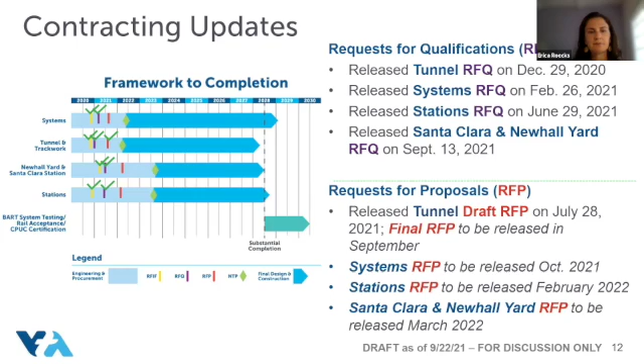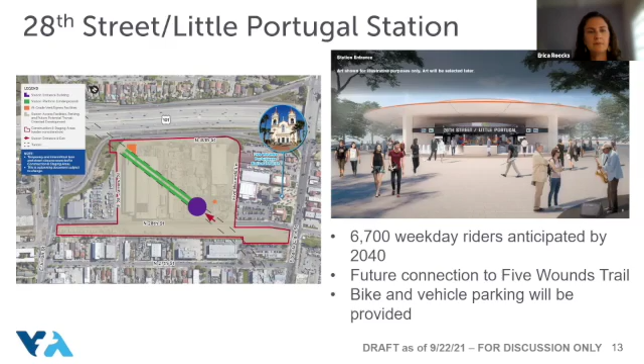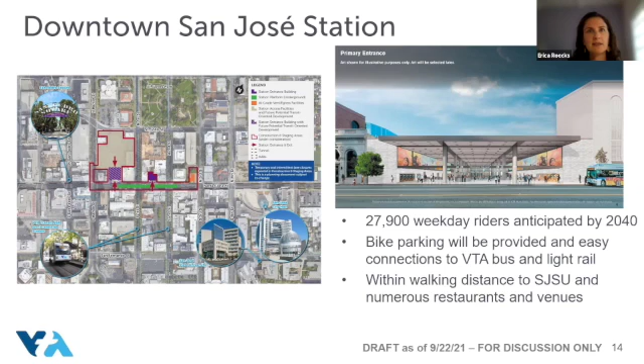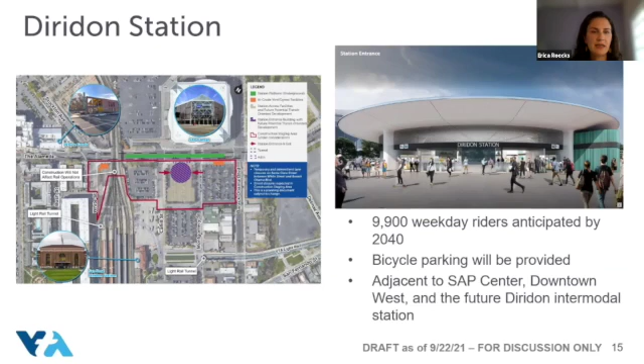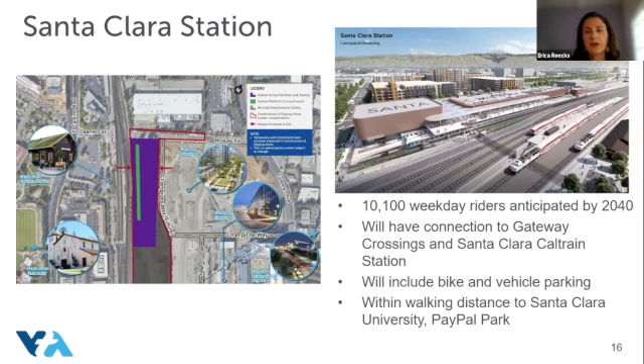Unlike the other three stations, the Santa Clara Station concourse will be elevated, and the platform will be at ground level, similar to the Warm Springs station. The elevated concourse will provide access to the at-grade platforms over the adjacent BART storage tracks.

And that's the phase 2 update we have for this time. I'm happy to take any questions.

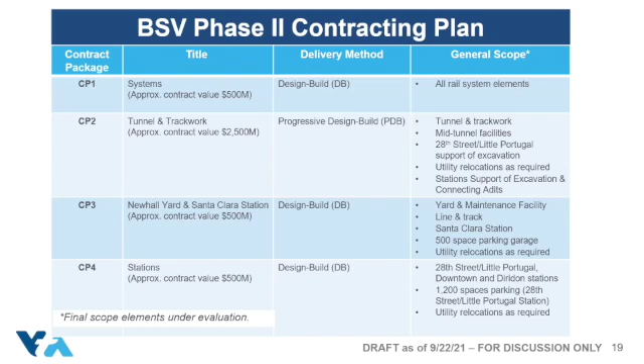CP1 and CP2 are set to begin in mid-2022 and go until early 2028 and 2029, while CP3 and CP4 are both set to start in late 2023 and go through mid-2028. Revenue service is scheduled to begin in the year 2030.

The project delivery method for CPs 1, 3, and 4 is design build. This means that architectural design and construction services for each fall under a single contract and have a single point of management, with the design beginning with a 30% package prepared by the owner and the remaining design left to the builder in accordance with owner-defined criteria and standards.

Design build allows for simplified procurement processes and better integration of the design and construction phases. This also means the design and construction teams are formed prior to the proposal stage. The cost of design build is competitive, but the main driver is its faster project delivery, since construction can begin in parallel with design, build can provide significant time savings.

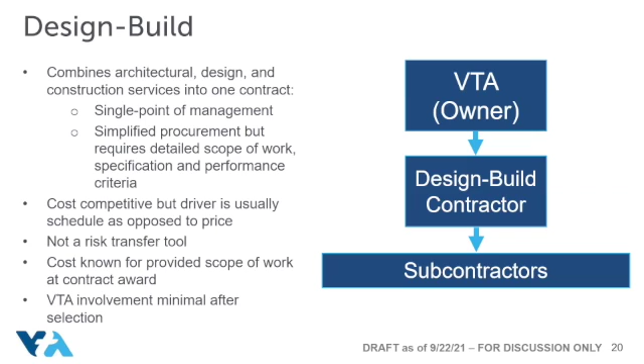According to a 2018 study by the Construction Industry Institute, design build projects had 102% faster delivery speed than the more traditional design bid build. Cost is also known when the contract is awarded. After selection, the design build contractor uses their skills and expertise to complete and build the project. VTA's role is to oversee their work.

Progressive design build is the project delivery method for CP2. The process is similar to design build, but contracts are made with the design build contractor at an even earlier stage in the project's development, utilizing about 10% design definition, and the contractor selection is mainly based off of qualifications.

Due to the contract size and complexity, a high level of collaboration and input from VTA, BART, and the progressive design build contractor is required throughout the design phase and construction phase. This helps avoid creating a design that is either too expensive and/or challenging to build. This process also creates a transparent and iterative open book cost evaluation estimate, maximizing innovation and limiting project risk.

Since progressive design build helps identify and mitigate issues early, CP2 will benefit from this project delivery method as it allocates risks appropriately and welcomes an open and collaborative environment between both VTA, BART, and the contractor.

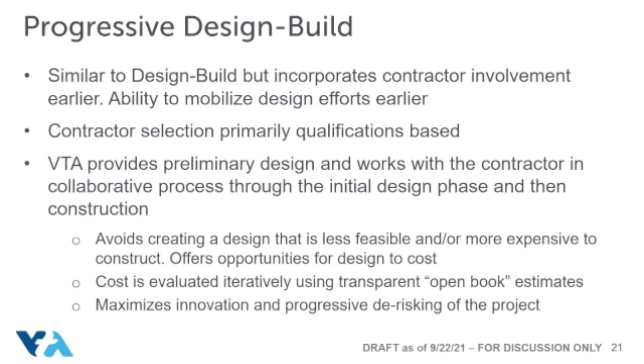The project's progressive design build process will include two main stages. Stage 1 will include collaboration between the progressive design build contractor, VTA, BART, the City of San Jose, and the community. It is in this phase that pre-construction design will be advanced from 10% to 90%. The bulk of pre-construction activities and some limited preparatory early work will also be included in this process. This will also include starting the procurement of the TBM, which will be specifically manufactured for the project and will take over a year.

During stage 2, the progressive design build contractor will provide a proposal that includes construction costs, schedule, and risk mitigations. Stage 2 will follow the construction process through the completed design.

Thank you for taking the time to learn more about VTA's BART Silicon Valley Phase 2 and how the VTA plans to deliver the largest public works infrastructure project in Santa Clara County's history.

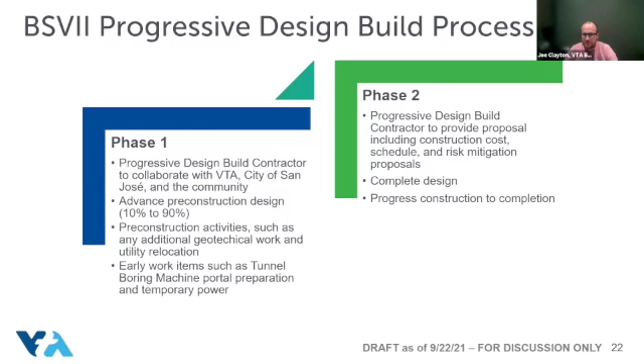Thanks, Joe. Do we have any questions from CWG members? Feel free to raise your hand. And I'll just check the Q&A box. Okay, not seeing any come in. Thank you so much, Joe. Appreciate you joining us this evening.

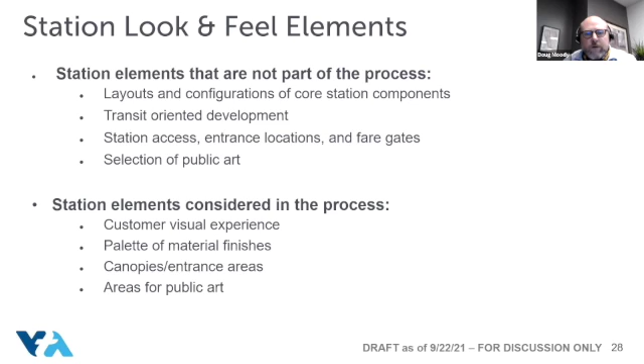Next slide, please. So the process for the look and feel elements of the station - we're entering into the finishing stages of it. We had 4 rounds of DRC committee meetings. We had the broad public engagement that we're currently summarizing the info from. The culmination of this work goes into a report that will be entered into the RFP for design build contractors.

And then that RFP is wrapping up here very soon. After that, there's a few months of work that happen. There's internal review with the VTA/BSV project team. Then the RFP is reviewed with the City of San Jose for this particular station, and the BART team, where they have an opportunity to comment. Then comments are addressed, and the RFP is finalized.

And then the RFP for the design build contractors for the station is released in the first half of 2022, with that report. The focus is on the findings from this work for what the design, the look and feel elements of the station should be.

And with that, I'll pass it over to Peter to talk about some of the concepts that were shared with the public.

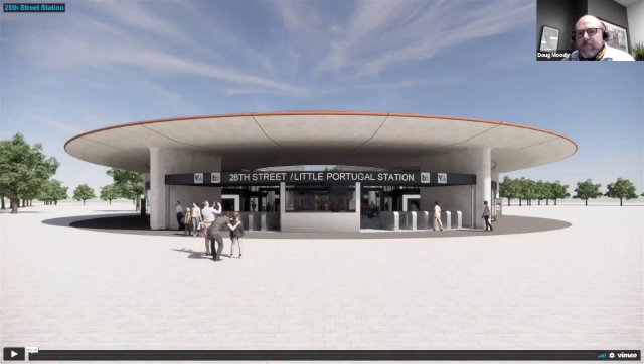Good afternoon, everyone, and thank you for hosting us. I think most of the material here, if you've been to the Social Pinpoint website, you would have seen, but I'm just going to talk you through some of the materials.

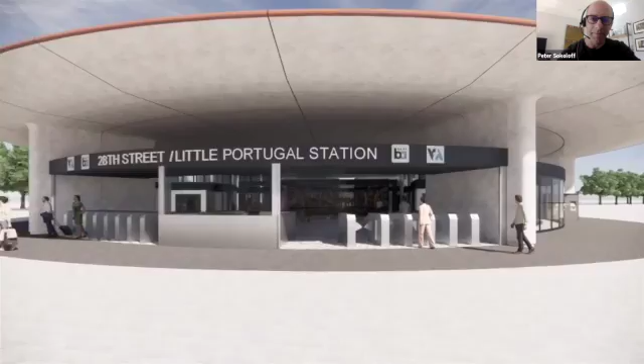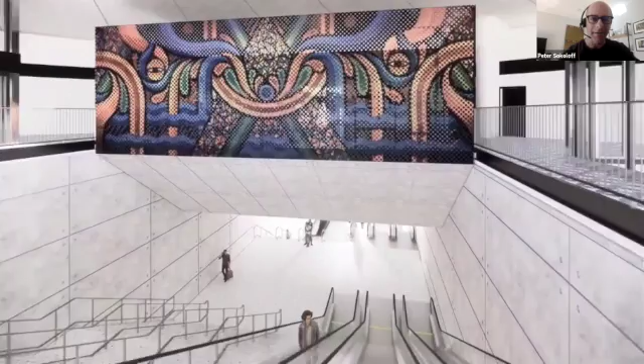This is a fly-through of the station at 28th Street, Little Portugal. So you're entering here and just gone through the fare gates. We have a circular canopy which lets natural light down into the lower parts of the station. You can see one of our locations for public art up there at the top of the escalators. Then you come down to an intermediate landing, down to a second run of escalators as you head down to the concourse. This is a second location for public art - again, these aren't the art pieces themselves, just the locations we're talking about.

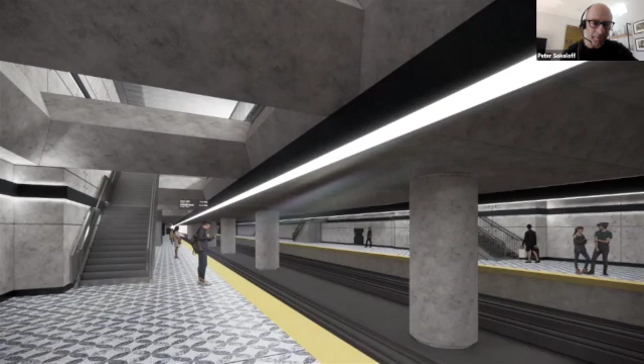This is the concourse level, and these stairs lead you down to platform level. So in the fly-through, we're just going to pick one of those to come down onto the platform. 28th Street has 2 side platforms, so side loading platforms with trains down the middle. This is now kind of looking back at platform level. Again, the fly-through is really just to give you an overview of the configuration of the station, so you understand how the spaces fit together.

This presentation goes into some of the material selections and the content from the design review committee work we had done up to the point of the Social Pinpoint, just to give you an overview of that. Again, here you'll see the scope of the design review was really about the look and feel of the station, the materials, floor and wall finishes, and the locations for future art. Go to the next slide.

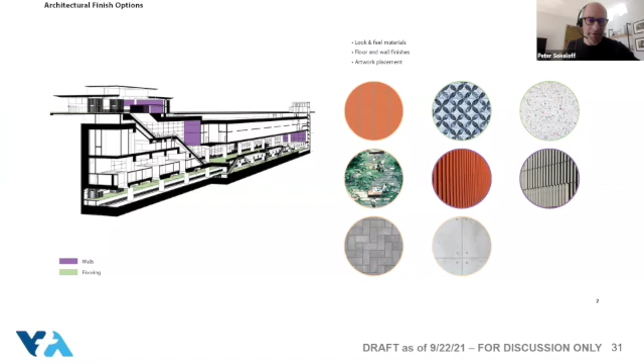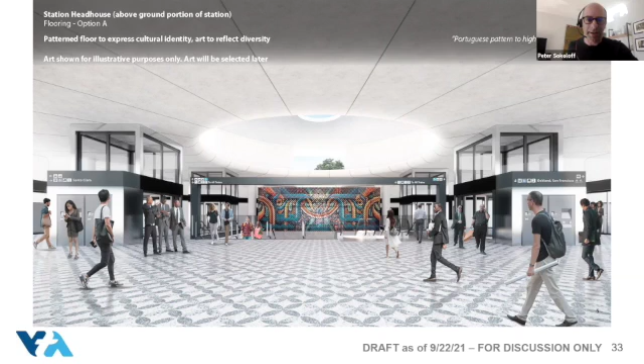And then paving going up to the station entrance. As you enter the station, another thing that evolved was a few different options for floor treatments. This one is a terrazzo floor with that Calzada Portuguesa pattern, which references both the local community and the cathedral, and helps give the station a unique identity.

We also had an option which was a more typical terrazzo floor. It's more neutral, and some people felt it was a bit calmer. It also has more of a reflective quality, letting more light into the station.

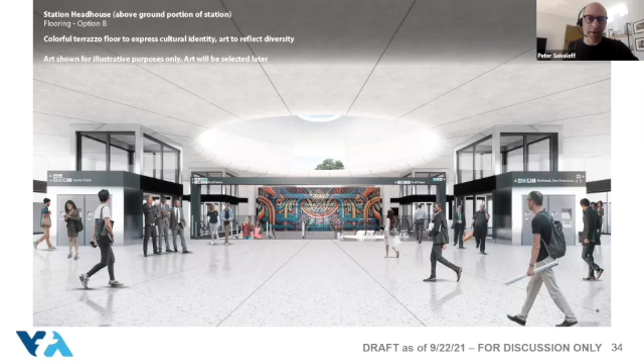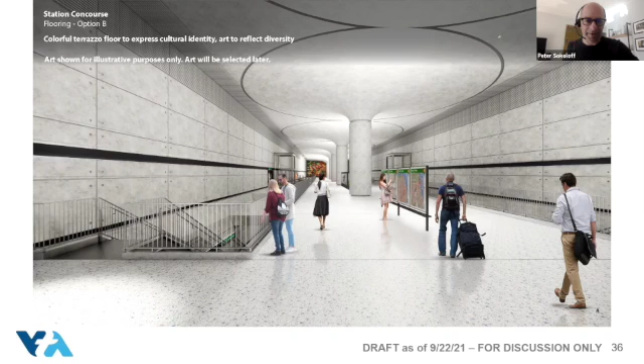Similarly, those two options play out down at the concourse level—both the pattern floor and the more typical terrazzo—and the same down at the platform level. There was a lot of positive feedback on the social pinpoint about the pattern floors, especially at platform level, where it can act as an identifier for the station—if you just look out the doors when they open, you know exactly which station you're at. We're still working through that.

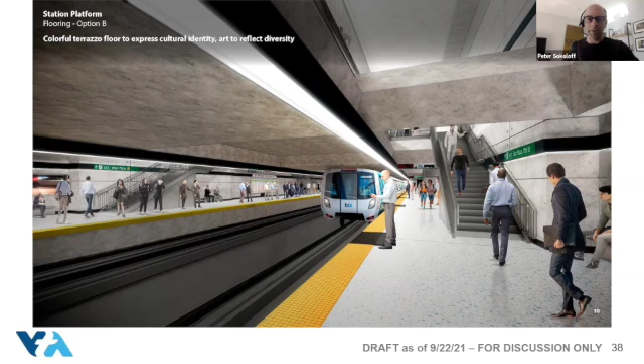We did get some feedback from BART about the technical aspects of having the pattern floor, which we have to work through. But that was definitely one of the key areas of feedback from the social pinpoint—getting people's views on that.

The second topic of discussion was the treatment of the pavilions at the backside of the station head house at ground floor level. The front of the station, shown in the previous image, faces onto the plaza and is quite open, but there are a lot of technical rooms and spaces that need to be enclosed on this backside, so we had a few different options for the cladding and wall treatment.

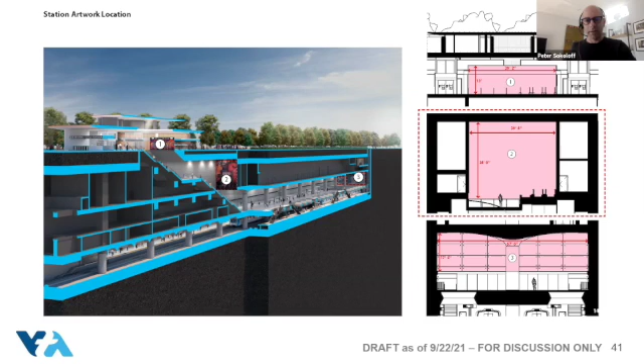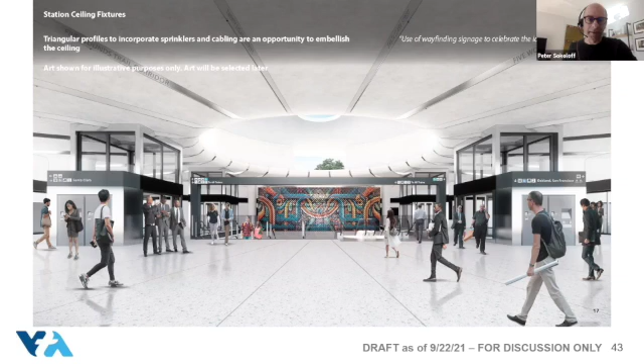The third topic was the location for the art, which I mentioned as we went through the fly-through—three potential locations. One draws you into the station at ground floor level, so as you're at the top of the escalators, you look across at a piece of art. Another is as you're going down the escalators, and the third is at the end of the concourse. I think all of those are great opportunities for art that would be selected sometime in the future, but planned as part of the station design so we can coordinate those locations for lighting and other elements.

The last topic was the canopy itself and the treatment of the ceiling. Here you'll see we're proposing radial elements that act almost like indicators. They emphasize the circular entrance and the oculus, with light coming down through the middle, but they can also act as wayfinding.

Not the official BART wayfinding that tells you where to go for the platforms, but more landmarks of the community, like the Five Wounds Church and the trail, to celebrate the area and make a connection between the station and the surrounding destinations. Those could be changed over time—they're not fixed into the building fabric, but panels that could always be switched out. They also have a practical aspect, helping to route sprinklers and other devices that need to be in the ceiling. So they serve both a practical purpose and as a feature of the station at the same time.

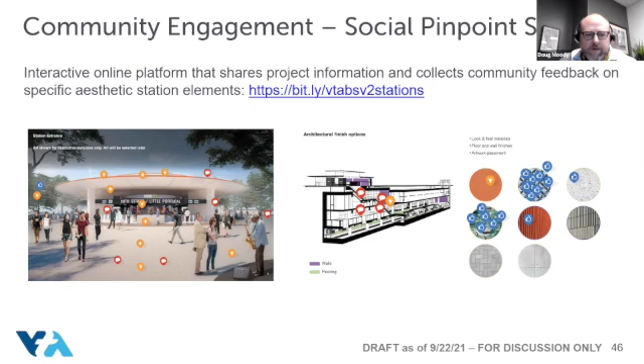Next slide, please. On the Social Pinpoint site, you can see some of the feedback from people using the site. I have some numbers on how many people interacted, but to reiterate what Peter was saying earlier, you can see on the previous slide all those likes on the Portuguese tile.

So for statistics, these numbers are a little more updated. Overall, the survey homepage for all 4 stations had about 2,000 unique users interact with it. For all the other stations, between 200 and 400 people interacted, with around 270 for the survey page for the 28th Street Little Portugal station. Over 50 comments were left by community members about the station, and over 60 survey responses.

Next slide, please. So how is the feedback we received going to be used? We're in the process of summarizing it, and that summary goes into the report I was describing, which goes into the RFP for the design-build contractors. We'll also summarize that content in the report and post it on the website.

Including responses to other feedback received—I'll describe that in a bit. There were specific questions we were asking as part of this process, things that are in scope, and we got a lot of feedback related to that. We also got a lot of feedback on things not in the scope of this particular effort, the look and feel elements of the station.

But that feedback has been really helpful—it helps us understand what questions are out there in the public, what issues exist in the public conscience. There are some instances where it's helpful for us to educate the public, since there might be misconceptions we need to provide more info on. Or there's info we can consider incorporating into other parts of the project that aren't look and feel elements.

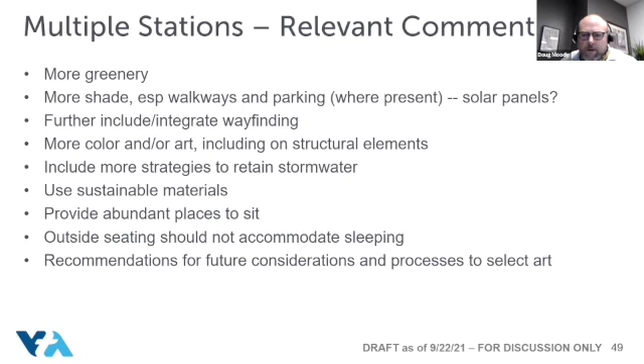Specifically relating to the 28th Street Little Portugal station, there was quite a bit of supportive feedback. A lot of people liked the design elements inspired by Little Portugal, and really liked how that translated into the tiling that was shown, and other features like the terracotta on the roof.

There was also a really great picture shown from a station in London that has a similar circular concept to the 28th Street Little Portugal station, which we all thought was fun.

One of the things Scott is thinking about sharing with the public in future work, digging deeper into, is the lighting related to this—how is the lighting design for the station, and what does the station look like at night? Next slide, please.

We also received constructive feedback. Although people liked how the Portuguese design elements were integrated into the station, they thought that could be done better. We heard comments like the tiling shown looks dated, and that the entrance could be incorporated into a building rather than made standalone. So yeah, constructive feedback as well.

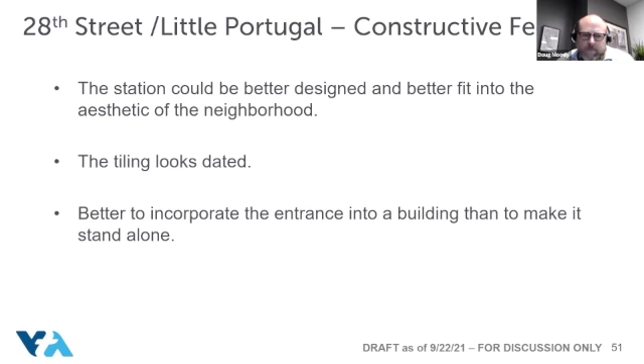Some relevant comments we think we can really act on: people like the Portuguese design treatments, so we'll continue carrying those forward and see what opportunities there are. We heard that the plain flooring is calming and looks modern, and that perhaps the tiling should be more of an accent than covering the whole floor. We're taking that feedback and exploring options to integrate concepts like those, which can often pair well with BART facility requirements.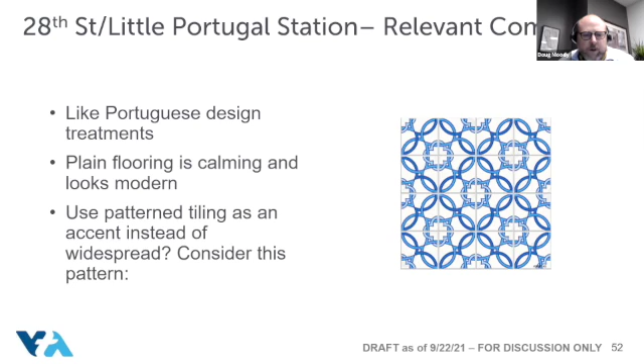Next slide, please. So what are the next steps? We're summarizing the findings right now. We're working on developing updated concepts based on the feedback we heard, to summarize into the report that goes into the package for the design build contractor for the stations in San Jose. We'll develop a summary of that and post it on the website, so everyone can see the feedback we received, how we responded to it, and have answers to the helpful issues raised during this process.

The RFP then gets reviewed with both the city of San Jose and BART, and after it's finalized, it's released in the first half of 2022 to potential design build contractors. And that is all we have—we'll stop there and open it up for questions.

All right, Doug, since you previewed the seating question, shall we start on that one? Yeah, sorry—I was going to answer it in the chat, but I pressed the wrong button and said I would answer it live, so I'm happy to answer it live also.

Yes, things like furnishings and landscape are not shown in the renderings at this stage, but the intention is to have them there. There will definitely be seating at the concourse level and also down at the platform level that's just not shown in those views. So the views do look a bit Spartan, but in the future there will definitely be seating, and likewise there will be landscaping. It's still early stages of development right now.

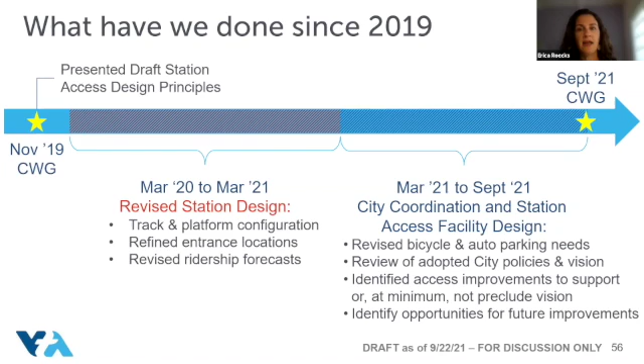Since March of 21, we've been meeting regularly with the City of San Jose to discuss station access and circulation design. Based on the updated ridership forecast information, we've revised the bicycle and vehicular needs. In combination with the revised design, we've gone through a technical process with the city, which has included reviewing the adopted city policies and vision, identifying access improvements which support that vision, or at least do not preclude it, and identifying opportunities for future improvements.

During the technical biweekly meetings we've had with the city since June for each station, we've established a shared understanding of the basis of design of the station, confirmed the station area vision, and discussed access and circulation features. We've also worked together to identify processes for community and public review and input, such as the Five Wounds Urban Village Plan update, which will be covered later this evening. We're documenting the access and circulation facilities in a basis of city facility design memo that will be included in the RFP for CP4.

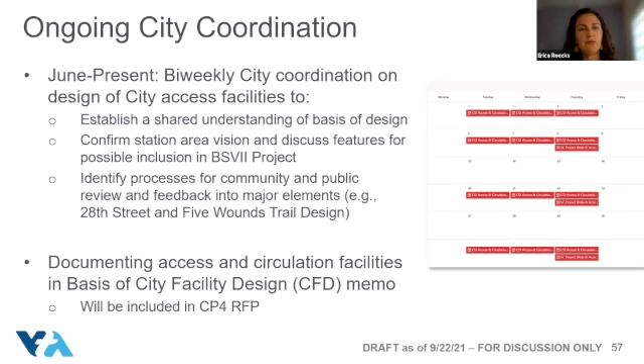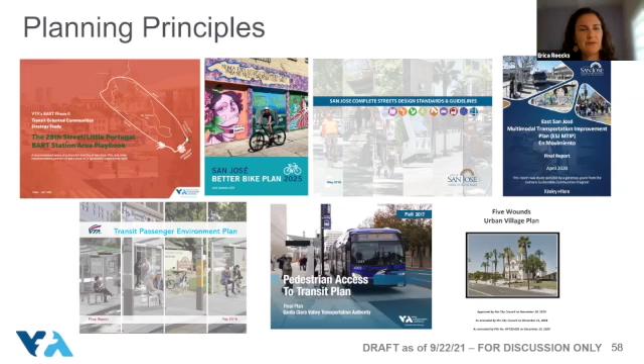One of the priorities has been creating, if we can go back to the slide before please, a pedestrian-focused environment along 28th Street. And for bike access, we're considering access routes and bike parking needs. We're looking at access and circulation that accommodates on-site bus needs and provides strong connections to the transit on Santa Clara Street and Julian McKee. We're also considering Cristo Rey pickup and drop off and looking at minimizing through traffic on 28th Street. And we met with Sylvia earlier today on this topic, actually.

In addition, we wanted you to be aware of the various city-led and VTA-led planning efforts that will have further opportunities for you to provide your input. These planning efforts will feed into the phase 2 design. En Movimiento, which you've heard about here in the CWG meeting several times, was adopted by the city in early 2021. The city plans to commence the Five Wounds Urban Village Plan update, and VTA will be commencing the master planning process for the 28th Street Little Portugal Station in early 2022, both of which you'll hear about in just a minute from Jesse and Charla.

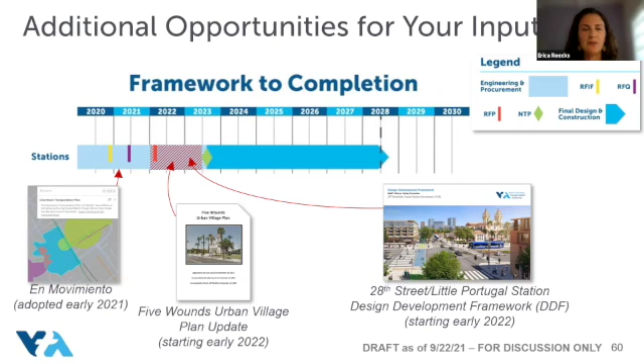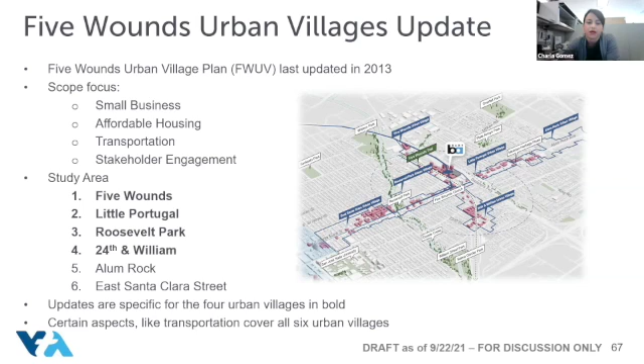Next slide, please. Jesse, this is yours. Thank you, Charla.

The design development framework for the 28th Street Little Portugal station is closely related to the Five Wounds Urban Village Plan update, but covers a smaller, more focused study area anticipated to be the future land holdings of VTA post-station construction. You might ask, what is a design development framework? It's a structured framework for VTA to engage with developers, providing an outline for VTA's desired outcomes for the TOD and a framework for evaluating TOD proposals in the future. The goal of this forward-thinking planning is to establish a flexible framework for future uses and functions on VTA property, to create a cohesive transit-oriented development opportunity, and to optimize VTA's TOD outcomes at the station. Ultimately, we hope VTA's TOD will help catalyze surrounding development and equitable economic opportunities in the neighborhood.

It's important to note that the TOD at the station will not take place until after the station area construction is complete. However, given all the effort that goes into a successful TOD, we're getting a head start on the planning component now. There are many concurrent projects in this neighborhood. As noted previously throughout this meeting, and as you've heard in the CWG process, BART Phase 2 construction is slated to begin in mid-2023, wrapping in mid-2028, followed by testing before opening service.

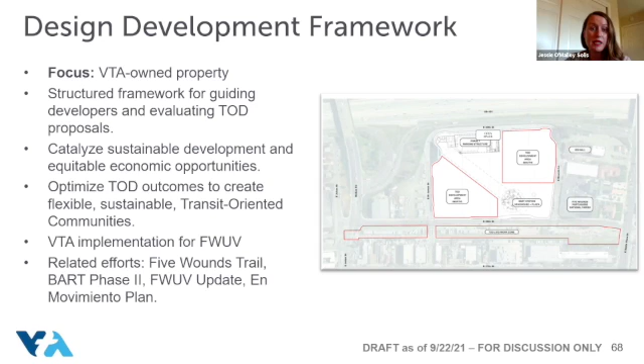We wanted to share our anticipated schedule. The Five Wounds Urban Village Plan update and the Design Development Framework are concurrent efforts. Procurement for the DDF is currently underway, and the Five Wounds Urban Village Plan procurement will closely follow. We hope to kick off both projects in early 2022 and wrap both projects in late 2023 or winter of 2024.